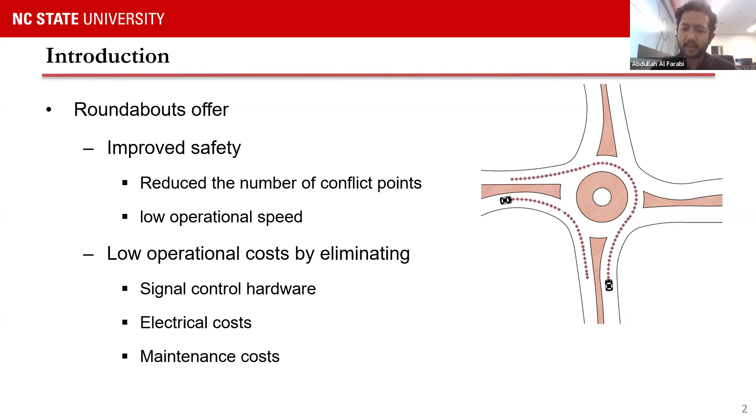Having all those benefits, roundabouts are suitable for low to medium traffic. They are not good at handling when the traffic demand gets very high. The reason is that roundabout relies on stochastic gap acceptance mechanism of drivers. This will be much clearer if we look at the example.

So we have a scenario where two cars, one is on the circle, another is a blue car that wants to enter the roundabout circle. The hesitant blue car driver, assuming that it will have a conflict with the black car, yields to that car. But what happens, like we can see at time step 4, the black car just passed by and it never had any conflict with the blue car. The blue car right now decides to enter the roundabout. So this is a pretty common dilemma we see in a roundabout where the utilization of available gaps is kind of inefficient. Such inefficiency increases the wait times of the cars and thereby increases the delay.

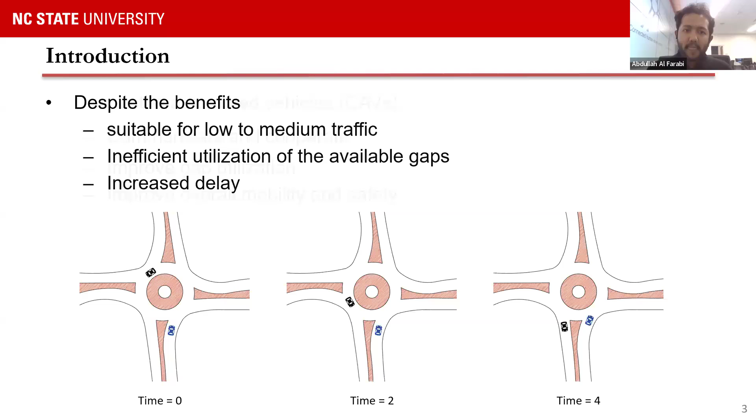So if we talk about connected automated vehicles, or CAVs, cars which have computing resources, they can communicate, broadcast information, and receive information. Based on so many articles, these cars are great at communicating and cooperating. They're great at improving the gap utilization, as they can do the communication. Thereby, they have a better mobility, and can ensure better mobility and safety.

This brings our research question: how we can use the connected automated vehicles, the CAVs, to improve the traffic flow in a roundabout. If we had full CAV fleets, all the cars are CAV, they could simply communicate with one another and reduce the stochasticity of gap acceptance significantly. That would be a very ideal scenario.

But when we have human-driven vehicles, any CAV that can operate optimally, if it is stuck behind a human-driven vehicle who is hesitant to enter the gap, it increases the delay for both the HVs and also the CAVs. On the left-hand side of the figure, we can see a roundabout circle where one of the cars is yielding to the circular vehicle.

It is not sure whether it will have a conflict with it or not. On the right-hand side, we have a CAV which is operating optimally, and if it can pass some sort of guidance or information about its direction, and it can help reduce the stochasticity of the HVs, we can significantly improve the operations of the roundabout.

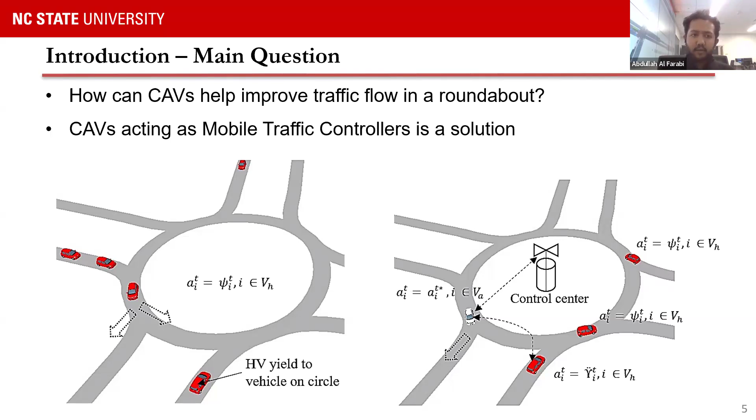Therefore, in this research, we have developed a methodology to optimize the trajectories of CAVs in a roundabout so that we can improve the traffic operations for both the human-driven vehicles and the connected and automated vehicles.

The study uses vehicle-to-vehicle and vehicle-to-infrastructure connectivity to control the CAV movements. And at the same time, we use the CAV as mobile controllers to guide the waiting HVs in the merging areas.

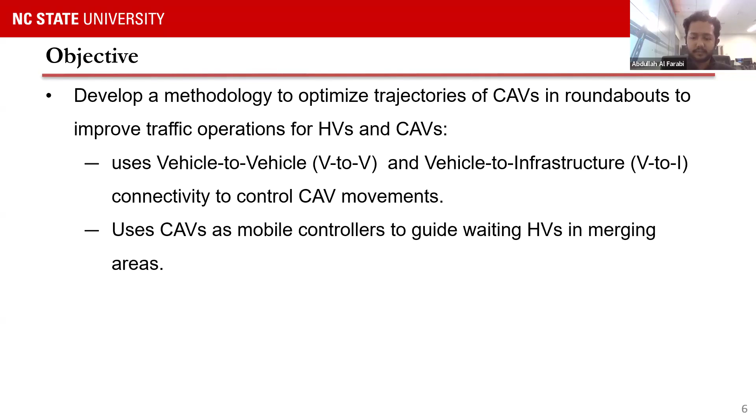So I will be discussing mathematical models behind this study. Before I go there, I would like to discuss some of the key notations that will be coming frequently in the next couple of slides.

First, we have the decision variable, the acceleration of CAV at any particular time, which is AI. We have position of a vehicle and the speed of a vehicle as state variables. We can see all of these are in bold form, so they are like a vector, so it has an X component and a Y component.

In sets, we have capital T as the set of all time steps. We have capital V as the set of all vehicles. We use subscript small a, VA, to denote the set of CAVs, and VH to denote the set of all HVs. We also have VM to denote the HVs that are waiting at the merging areas.

Another set is CIJ, which is also very important, as the set of vehicle pairs in the conflict zone that we are going to define. So a set of vehicles that are in the conflict zone is part of that CIJ.

In parameters, we have two most important parameters: R, which is the minimum safety distance between a pair of vehicles, and MIJ. It's basically an activation parameter. It turns the safety constraint on when there is a need, and it turns it off if the cars are far away and there is no safety requirement.

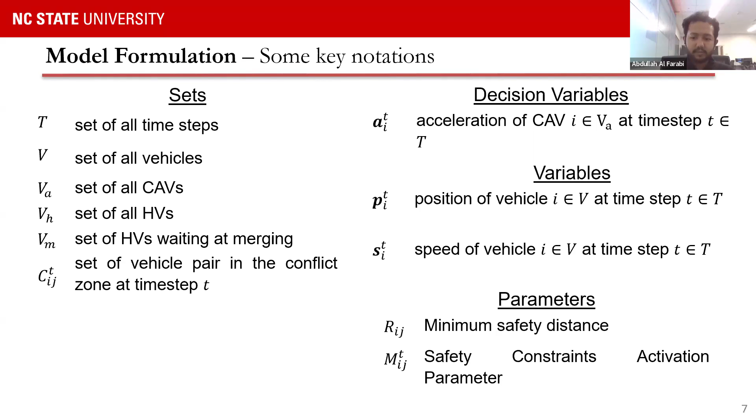So here's a part of our model formulation. At the beginning, we have the objective function. The objective function here has two parts. The very first part tries to maximize the throughput, which basically tries to make sure or push the vehicles to complete their trips.

Another part that we have is a driver comfort part. It tries to ensure vehicle acceleration does not deviate significantly. So we want to develop a model where we try to push as many vehicles out of the system as possible, while at the same time ensuring their comfort.

Here we have the kinematic constraints. Those are physics-based constraints. Basically, we use them to update the speed and position of vehicles over the time steps.

Then we have the initial position and initial speed. So we collect it from our system at any particular time.

We have constraints 5 and 6, basically for human driver behavior. As of now, we are expressing them with a generic function. Constraint 5 represents human driver behavior in the roundabout. Constraint 6 is a generic function as well. It tries to capture the effect: if an HV gets information, how will it react?

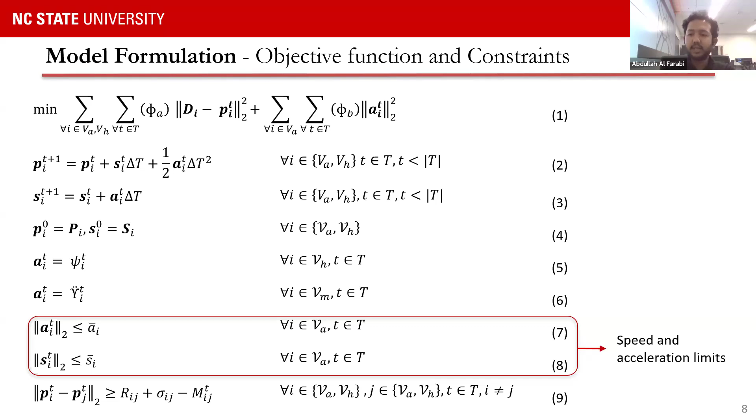So here we have a boundary for both the accelerations and the speeds of vehicles. We want to ensure the acceleration and the speed of cars do not go crazy.

Here we have the safety constraint, probably the most important constraint over here. Between any vehicle pair, we need to ensure a minimum safety distance is there, which is the Rij. We also ensure a sigma ij to deal with the stochasticity. We have the mij, basically a parameter I just showed one slide ago, so it just activates and deactivates the safety constraints.

So we are going to have a couple of discussions on the safety constraint itself.

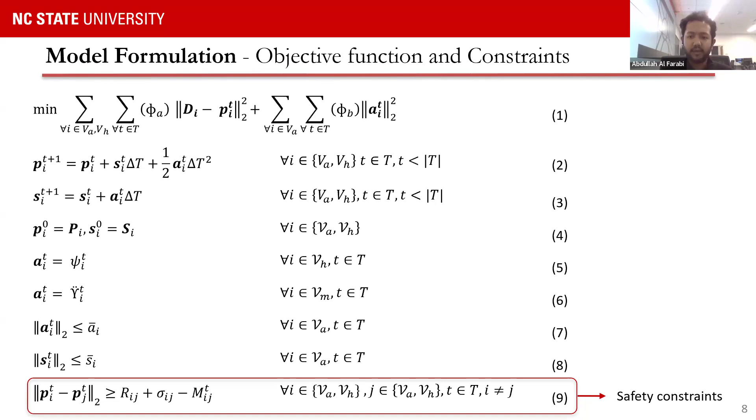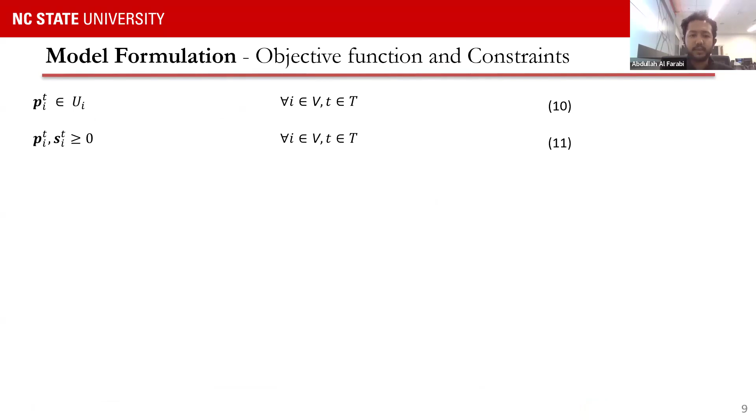In constraint 10, we have the planning constraint: what each car is going to do in the long run, which direction it is going. Then we have a constraint where we ensure position and speed have at least a value of 0.

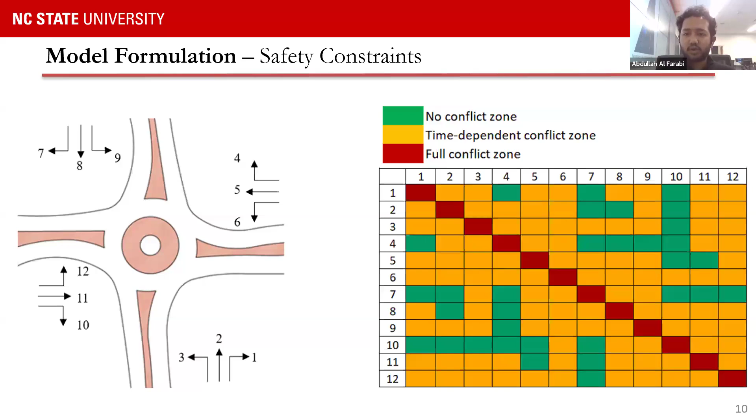The yellow is a time-dependent conflict zone, and the majority is yellow, which is basically when 2 routes have a portion where they will have conflicts. This will be much clearer if we show these diagrams.

On the left-hand side, we have northbound through, which is route 2. So 2 cars are on that route, and these 2 cars we will always have to do a safety check.

On the right-hand side, we have 2 routes that share a certain portion: northbound right and northbound through. As long as the cars are in the yellow zone, or will be in the yellow zone based on the prediction, we will have to ensure safety. If the cars have diverged so their paths are no longer crossing, we can simply relax the safety constraint.

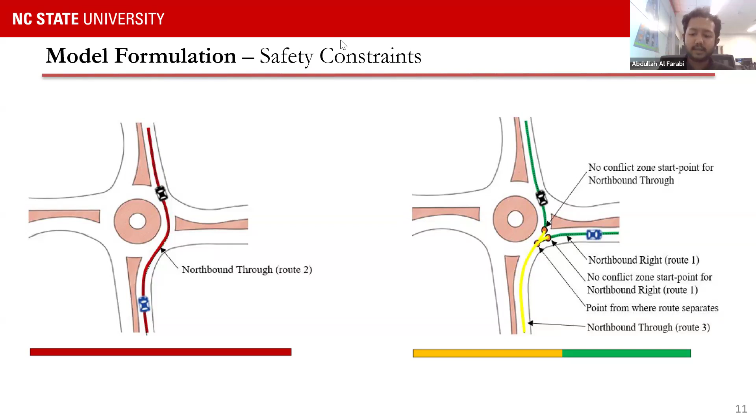Similarly, here we have 2 left turning movements. This is a complicated scenario, with 2 particular zones of conflict. We have to ensure safety during those particular zones; otherwise, we can relax the safety constraint.

Lastly, we have the northbound right and the southbound right. These vehicles will never have any conflict since they're in completely different directions. We can simply relax the safety constraint.

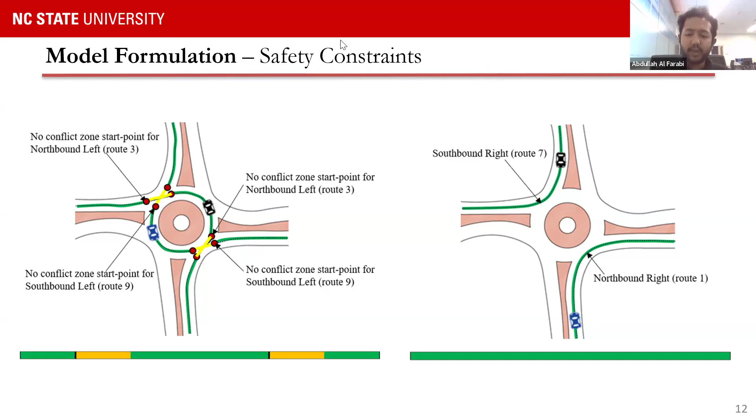So the model I have discussed so far optimizes the CAV acceleration decisions and at the same time generates guidance for the human-driven vehicles. This model is two-dimensional and therefore has many nonlinear constraints, so it's very complicated to solve. We can definitely use a heuristic algorithm, but that would affect the solution quality.

Therefore, we brought some techniques to solve the optimization model. At the very beginning, we simplified the 2-dimensional model using a Frenet coordinate system. This converts the 2D problem into a single dimensional problem, taking the vector form and converting it to a scalar form, which significantly reduces the complexity of the original model.

Then we have the nonlinear safety constraints, so we have to linearize them using the Big-M method. We have some generic functions for the human-driven vehicles, so we use a car following model and at the same time introduce a reduced speed area, which I will explain later, to model the behavior of HVs in the roundabout. Lastly, we have a model predictive control framework to account for any changes in the environment.

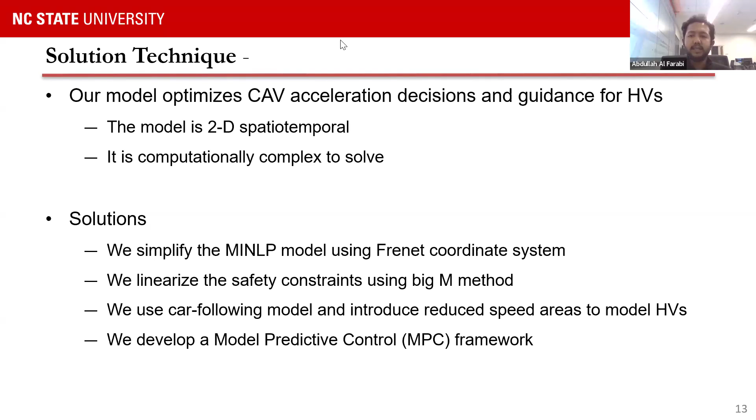Here is a quick slide for the Frenet coordinate system. In Frenet coordinates, positions are measured from an origin, and distances are simply measured along the center line of the road. On the right-hand side, we can see if we use the Cartesian format, we have to take the X coordinate and Y coordinate to get our safety distance, which is nonlinear and complicated for the optimization model to handle.

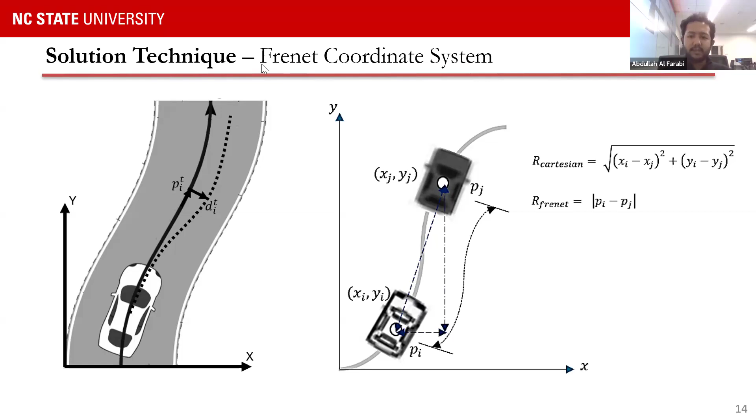However, if we use the Frenet frame, we can simply calculate and deduct the positions from car 1 to car 2, which is much easier. If we transform the optimization model using our Frenet transformation, we can simplify the model. This is almost the same as before: its objective is maximizing throughput while minimizing acceleration variation, but all these variables are now scalar.

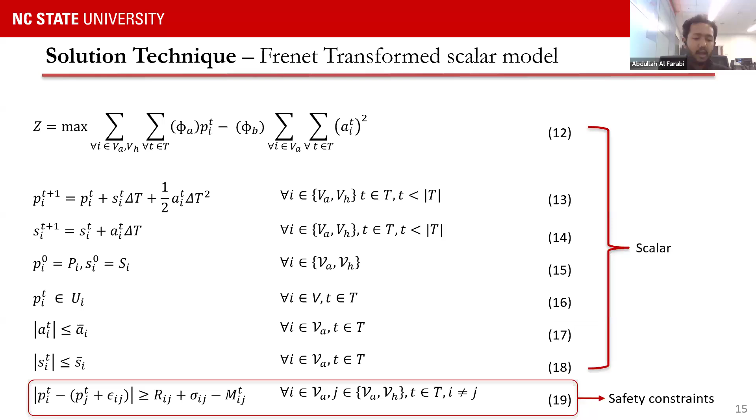If we look at the safety constraint, it is also scalar, but one change is that we have a term epsilon ij in the model, which is something new that wasn't in the previous constraint. The reason for bringing that epsilon ij is that when we convert the model using the Frenet frame, positions are no longer unique. Two cars at two different origins may have traveled 4 meters, but they are essentially the same to the model. Think about one of the scenarios in the figure: we have a conflict point.

So the white car can reach the conflict point traveling maybe 80 meters, while the black car can reach the same point traveling 120 meters. So at a particular time, if we simply look at the position, the model considers the position has a 40-meter difference. However, they are in the conflict zone.

So we somehow have to ensure that when we are calculating the position difference, we take account for that. We have introduced a relative distance parameter epsilon ij in the safety constraint so that the positions are comparable and we can ensure the safeties.

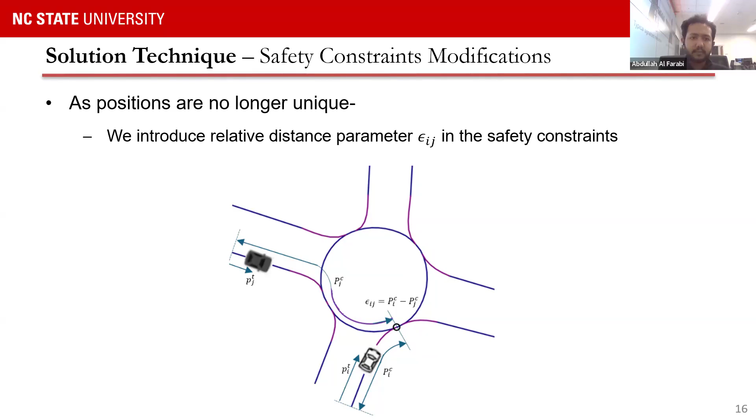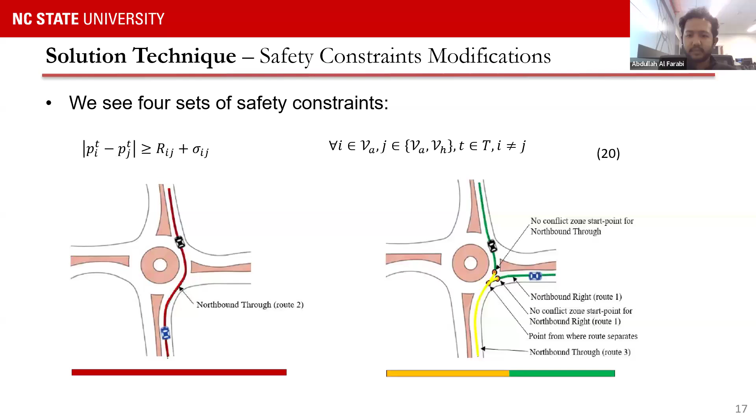Based on the previous slides and discussions, we usually end up with 4 sets of safety constraints. The very first one is constraint 20. We don't have any epsilon because all these cars have the same origin, but we still have to do the safety check, since there is a part of the route that has a conflict zone, shown as the yellow portion here. Another case is when the cars are completely out, where we do not need any safety check, and we also do not need any epsilon ij here.

Then we have the more complicated scenario where we have epsilon ij because we have to calculate the positions from different origins, and at the same time, sometimes we need to do the safety check. Sometimes we can simply relax it during the green time.

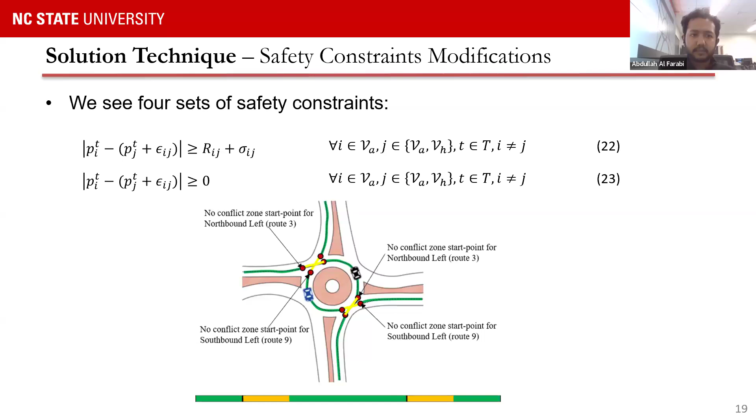So the conflict zone mapping parameter MIJ, we estimate it based on the current position and current speed at any particular time. I've already mentioned I use a Big-M method to linearize the safety constraints, so constraints 24 to 26 are basically the linearized version of the safety constraint.

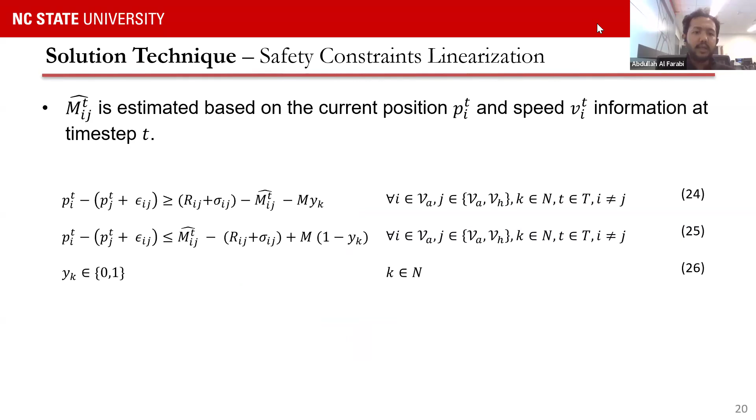Now, for modeling the HV behaviors, we have to predict the HV motion, so we use Gazis's car following model to do that. Constraints 27 and 28 are basically the car following model. It takes the lead vehicle and follower vehicle's speed and position to calculate the acceleration. Other than that, we have a reduced speed area constraint.

This is basically due to the fact that even under very low traffic, for example, when an HV has entered the roundabout approaching the roundabout circle, it has to look for gaps because it is not sure whether it will have a conflict-free gap or a conflict. Therefore, it reduces its speed. So we are accounting for such behavior using constraint number 29.

And constraints 30 and 31, same as before, just ensure non-negativity.

Here is the schematic diagram of the model predictive control framework. It has a couple of modules that I'm going over. First, I have the simulation model. We use micro simulation with PTV VISSIM to code our models. Our roundabout is there, and it generates traffic, creating a roundabout scenario.

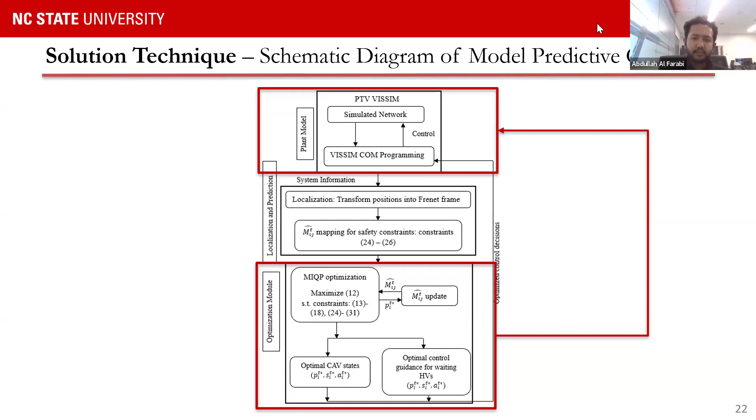A quick look at the parameters we used in the study: time step duration delta is 0.5 seconds. Maximum speed is 40 kilometers per hour, about 25 miles per hour. Our prediction horizon is 8 to 16 time steps, which is basically 4 to 8 seconds. Our maximum acceleration is 4 meters per second squared, and deceleration is the same in negative.

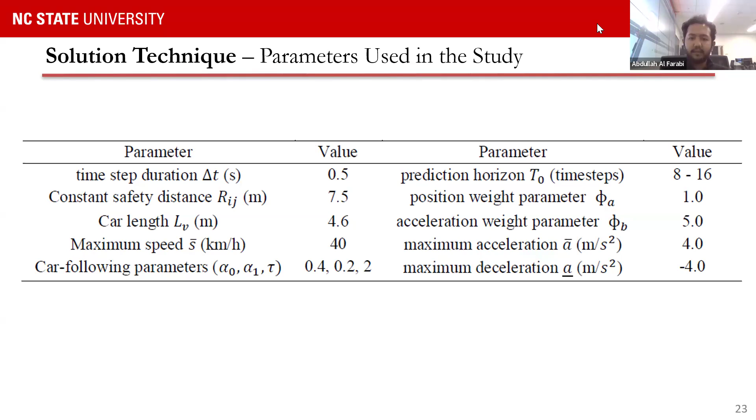That's pretty much it. So I can talk a bit about the case study now.

So we selected a single lane roundabout from Raleigh, North Carolina. We did two scenarios using that simulation model. Firstly, we did mixed traffic simulation based on the Highway Capacity Manual, and we compared our proposed control with that mixed traffic simulation.

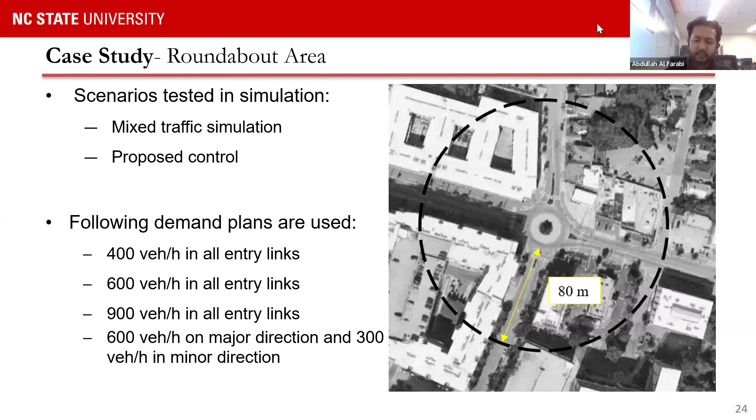A couple of demand plans were used, starting from 400 vehicles per hour up to 900 vehicles per hour. We also had one asymmetric demand plan: 600 vehicles per hour in one direction and 300 vehicles per hour in the other. The analysis period for our study was 15 minutes.

We have multiple CAV penetration rates, starting from 0%, which is plain HVs or conventional operation, and with 20% increments we went up to 100%, the full CAV fleet. Our analysis runs included 70% through movement, 15% left turning, and 15% right turning movements.

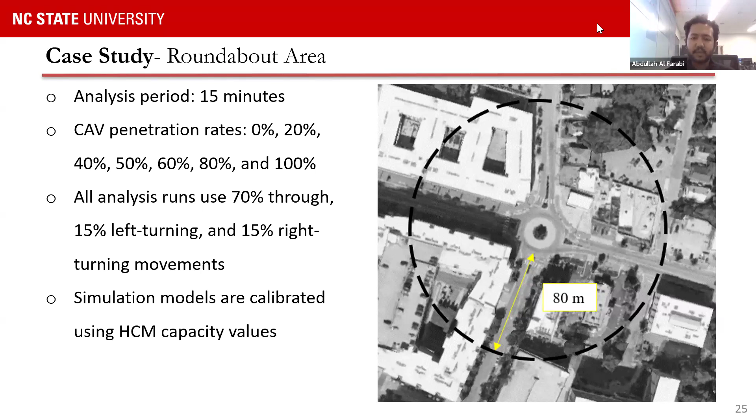We calibrated our simulation model by checking car following parameters and gap acceptance parameters for our benchmark, so it matches the Highway Capacity Manual capacity values.

Here is a comparison of our model calibration with the HCM value at two penetration rates, taken as examples. You can see that the simulation and the HCM match quite well, with a deviation of less than 5%.

So basically why we brought this up is to compare our proposed control with a model that has a more valid basis.

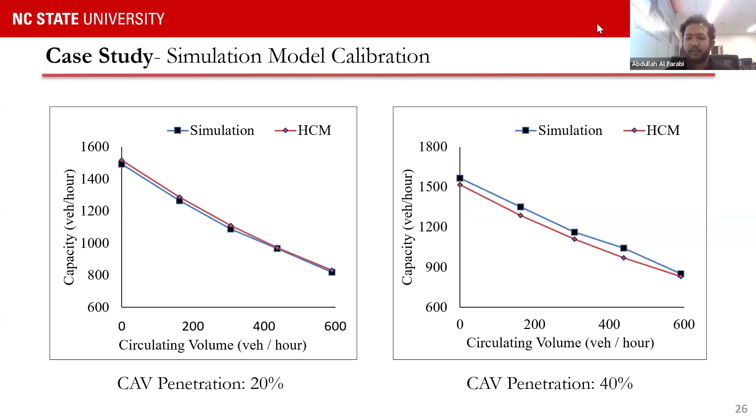What is HCM? HCM is the Highway Capacity Manual. Thank you. Sure.

Here we can see some animations. On the left-hand side, we have conventional operation with CAVs as per the Highway Capacity Manual, and on the right-hand side, our optimized operation. This is for a demand level of 900 vehicles per hour, which is pretty high demand, so we can see long queues forming in the conventional operation.

But if we optimize the vehicle movement using our control methodology, the model predictive control concept, the cars can talk to each other and have a very smooth operation with significantly lower gap acceptance time. You can also see the number of cars on the circle: conventional operation has a lower number, but in optimized operation we have much higher.

Similarly, in another animation we have 60% CAV fleet on the left-hand side and 60% CAV fleet on the right-hand side for the optimized operation, where we do some form of guidance to the human-driven vehicles to accept lower gaps. So we can push many vehicles into the traffic circle, and at the same time process a much larger number of vehicles with the optimized operation, compared to the simulation where vehicles are yielding and taking much longer gap acceptance time.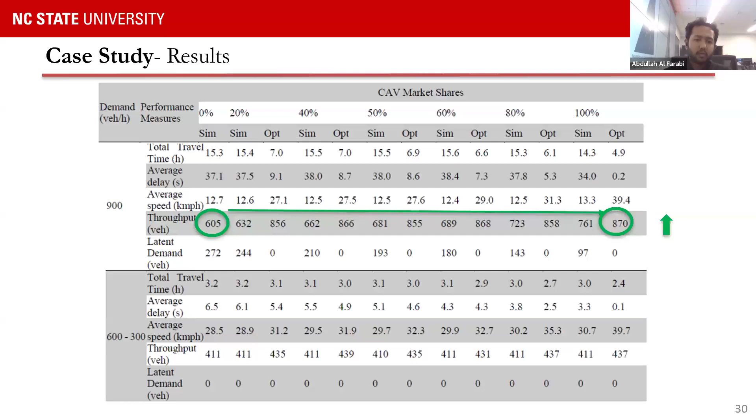Now if we look at the demand of 900 vehicles per hour, even with higher CAV penetration rate, the conventional operation could not drop the delay because it's a very high demand and it's a bit congested. We can see the average delay is almost 35 and more. But if we use the optimized operation, optimizing the CAV trajectories and also providing some guidance to the human-driven vehicle, we can drop the delay quite significantly.

Can I ask you a question? Sure, definitely. What do you mean simulation versus optimization? Optimization is part of your simulation. How do you distinguish one from the other? In simulation it's completely at random, is that what you're telling me? The simulation is the highway capacity manual based, calibrated model that we are running.

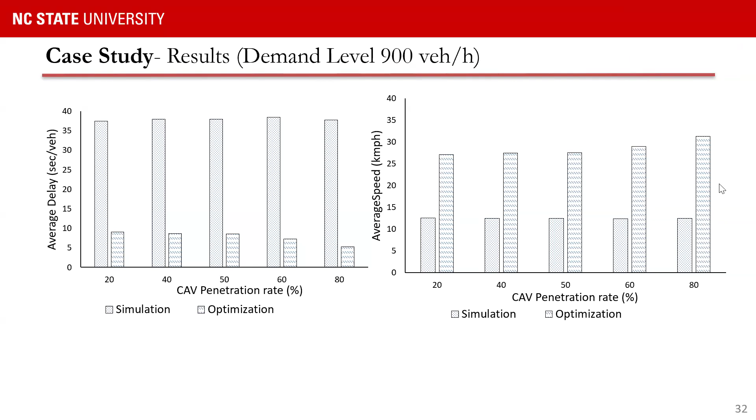And with the optimization? That is our proposed control, how we want the system to work. We are controlling the trajectories of CAVs and at the same time providing guidance to the human-driven vehicle. So basically both are done in the simulation, but one is the conventional operation, another is the proposed control. Maybe it is better to rename it because right now it's misleading, since both terms use simulation. I agree, I think a better title like conventional operation would fit. Okay, they're saying simulation because optimization also involves visualization and simulation. I agree with your point, thank you, that's a great observation.

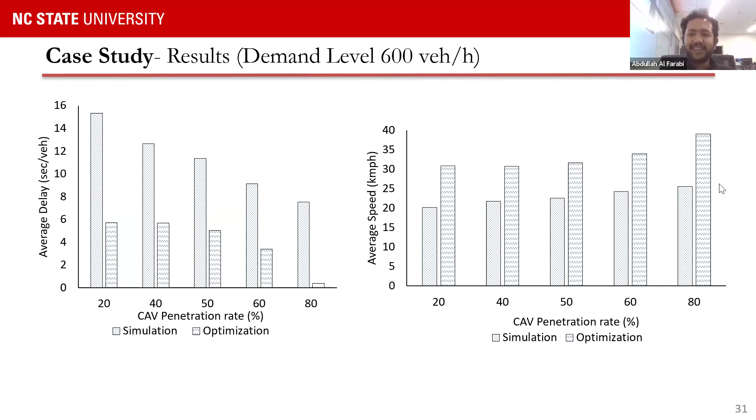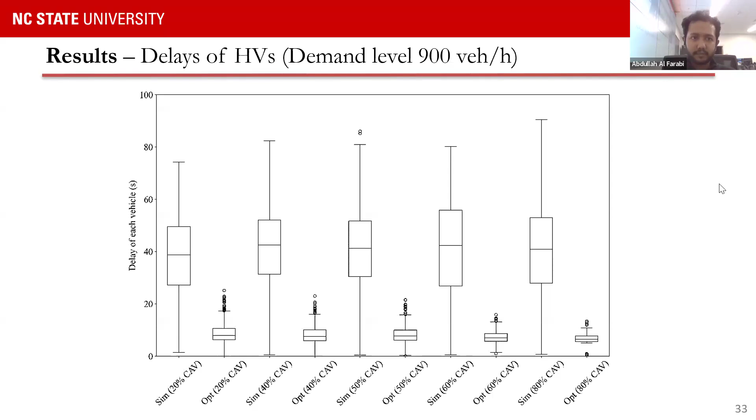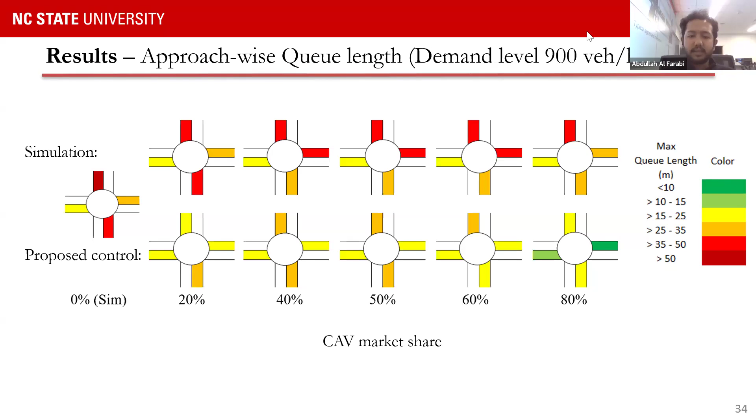A couple more results. We looked at the approach-wise queue length as well. In conventional operation, you can see the queues are a bit high, which we also see in the simulation animation. The queue length in approaches, in some cases, is more than 50 meters. But with the proposed control, as we try to push more cars into the circle, the queue length is much lower compared to the conventional operation.

The same goes for the delays. In demand level 900, we see quite a bit of delay in conventional operation for each approach. In some cases it reaches level of service E, or can get worse and become level of service F. But with the proposed control, the delays are kept in a much better condition.

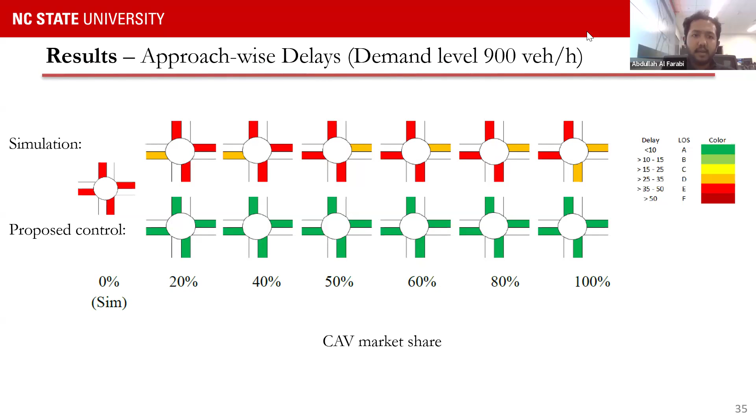As for computation times, it will depend on the hardware or computation resource, also the prediction horizon, how far we want to predict, and also the solution quality, what sort of optimality gap we are expecting.

So in this research, we have used an Intel Core i9 processor, a prediction horizon of 16 time steps, and an optimality gap of 5%.

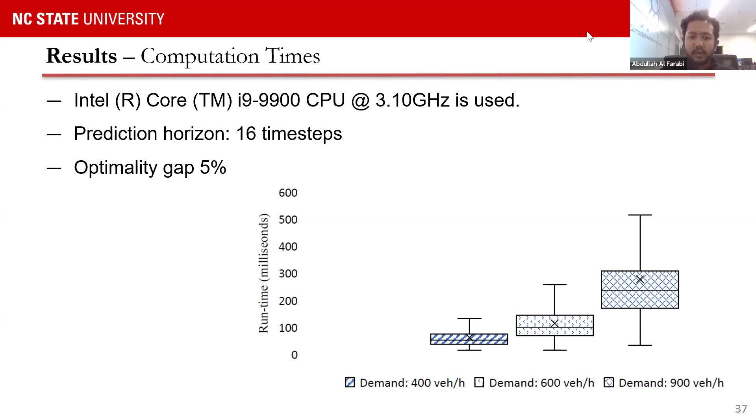So we can see the runtime variation for 3 demand patterns. Even for the demand level of 900 vehicles per hour, the maximum was around 500 milliseconds, but this is for a full CAV fleet.

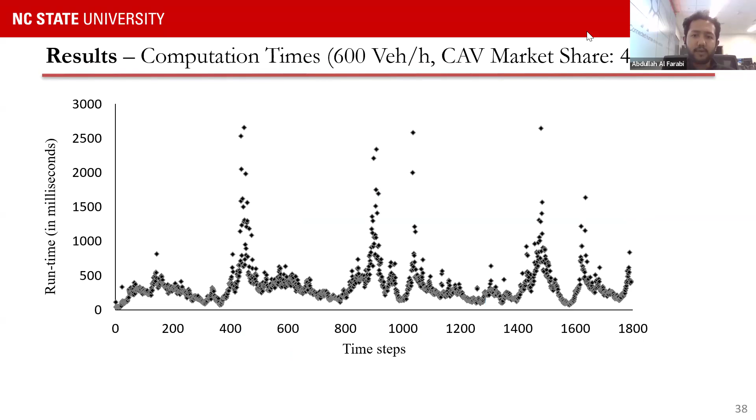In conclusion, we have developed a control framework that optimizes the CAV trajectories and at the same time guides the human-driven vehicles to enter the roundabout safely.

This approach reduces travel time by up to 68% compared to conventional operation. We also observed a 44% increase in throughput using the proposed control methodology, and this methodology reduces delay variation as well.

There are some limitations, definitely, like any other studies. We have not considered multi-lane roundabouts. We are thinking of expanding our work to multi-lane roundabouts.

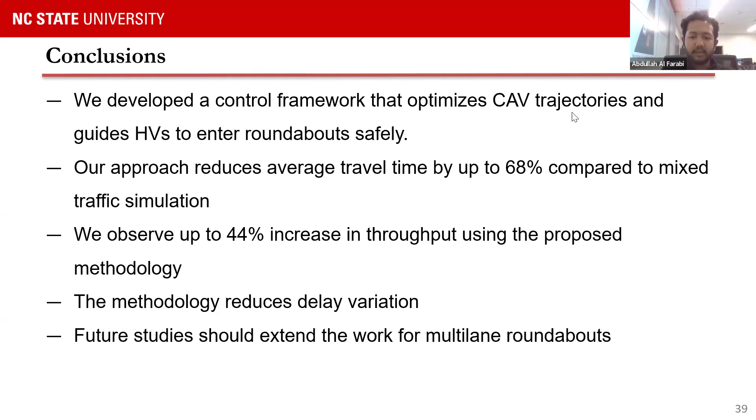And we have talked about a lot of communication, so we haven't really considered the latency, bandwidth, or power consumption. There are some things on that side that we need to consider if we want to go for implementation. So that's pretty much it.

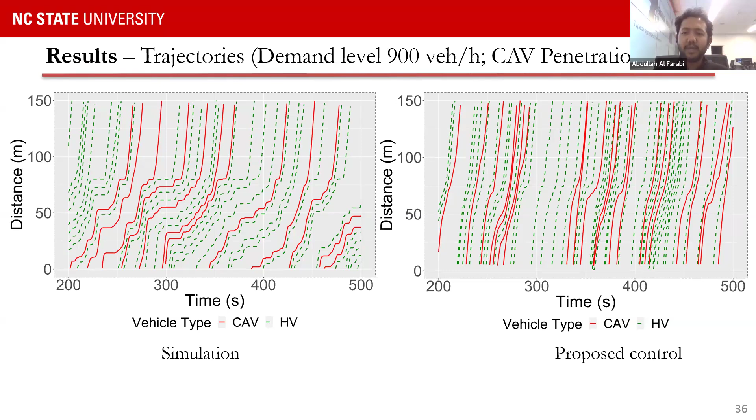Actually, we do have. We have modeled the human-driven vehicles, so somehow we have to model it. Otherwise, if we don't model human-driven vehicles, we somehow have to predict their movements, like what it is going to be, where it is going to be. So we predict their motion using a model.

So these are your constraint, or these are part of your objective function?

These are the constraints to mimic the HVs, or the human-driven vehicles, in the roundabout. So without predicting their behavior, the system will not work.

If I may, I'm going to ask one more question. Sure. Since the roundabout time is very short, I am not sure whether information between vehicle and infrastructure is going to help the driver make a better, informed decision, because the time is really short.

Yes, so then how is that infrastructure information going to help me? There are things like if it is a self-driving car, that's a different case. It has its own optimized trajectory, so it follows its own pattern.

So how the CAVs are doing is passing information to a human-driven vehicle in a couple of ways. If it is very congested, in animation you could sometimes see the CAV slowing quite a bit significantly, creating an additional gap time to let the HVs enter.

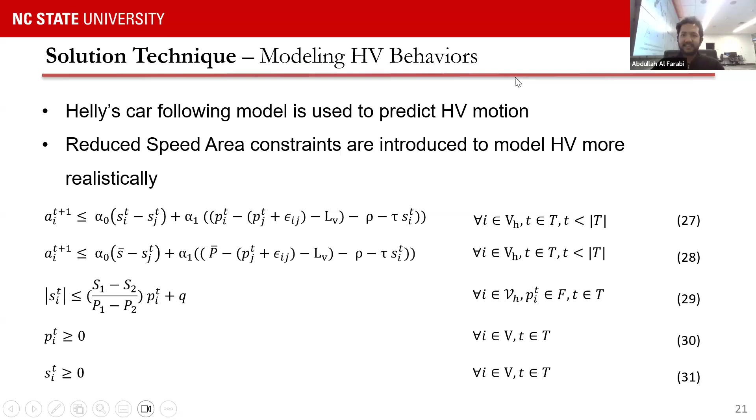Thank you. So, and you can hear me? Yes, yes. Okay.

So I know that you have been working on a sort of heuristic approaches as well. That's something you might want to give us insight on - the rationality of moving from this optimization-based approach to heuristic approaches, and the kind of thought process that led you to the heuristic approaches.

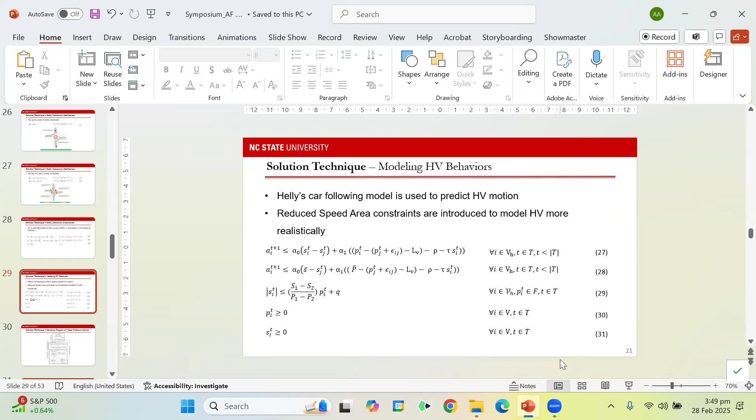Sure. The reason for moving to a heuristic approach is having the runtime issues. In real world, we will have a lot more complications, and even in the simulation, when we have more human-driven vehicles into the system, the higher their penetration rates, the runtimes go high.

So we always have a computational complexity to consider, so to have further efficiency without dropping significant solution quality, a heuristic would do better. That's why I'm developing a heuristic algorithm, ensuring both solution quality and improving the runtime as well - trying to find a sweet spot so I don't lose significant solution quality, but at the same time have a much closer solution to the central optimization at a much faster rate.

So that's the only reason for bringing in the heuristics. I feel like the proposed control, we solve it using an optimizer CPLEX, but the structure of the model is very much suitable for solving the problem with any other methods - it could be any heuristic at all.

So the formulation, like defining the conflict zone, defining the parameters, this is really helpful for heuristic approaches. And if you observe with the central optimization, we have an updating.